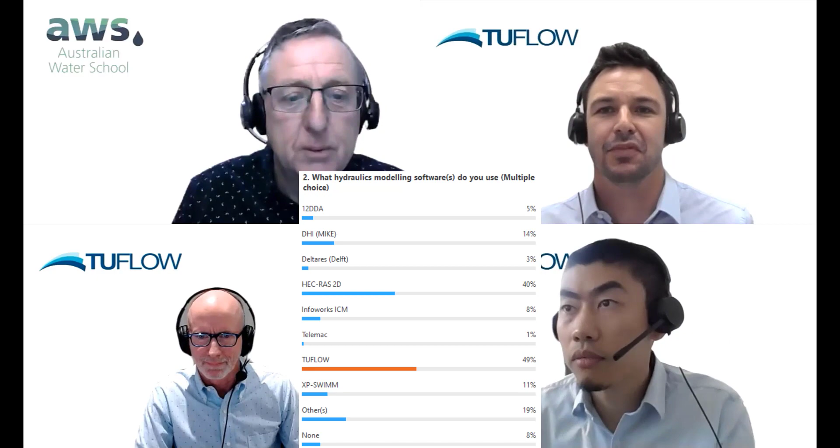And the second question, what hydraulics modelling software do you use? HEC-RAS is out there, so is Tuflow. There's the two biggies, and just about 80-90% of it's covered there. But that's pretty expected as well. Yeah, good spread overall though.

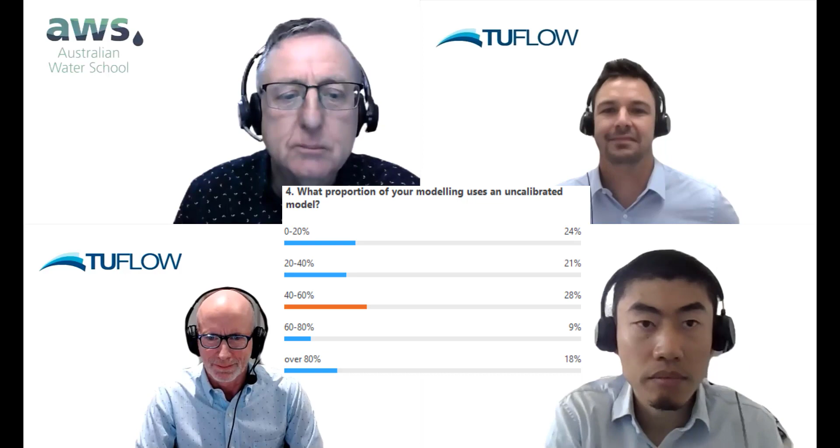Fantastic, yep, that's the way we want to have these webinars. What proportion of your modelling uses an uncalibrated model? Did you expect that? Probably about right. It's good to see that there's a reasonable proportion of calibration going on, so that's encouraging. It is, because it is hard. Often there's just no data, so you just can't do it.

And there's the last question: how accurate do you think your modelling is? There's a question for you. We chewed over this one before we put it up, everybody. We didn't know whether we should have put this question up, but there's obviously confidence going on here. Yeah, I think we need to have a show of hands on whoever put up perfect.

Right, who did that? Come on screen immediately. Tell us how you do it, because we all want to know. Wasn't that you, Bill? Didn't you? I actually want to employ them, that's what I want. Shuang and Phil, probably somebody's done this. Perfect, I love that. Hey, Bill's going to be presenting. Chris and Shuang and Phil, another colleague from Tuflow, will be on the Q&A lines waiting for your questions.

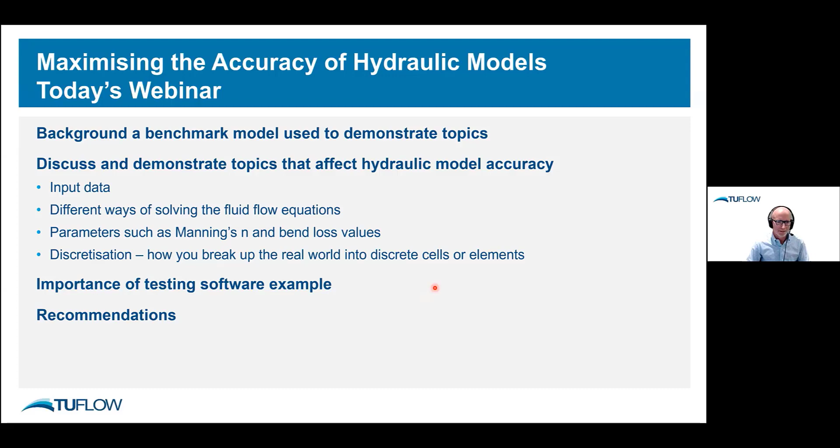I'll just finish off with the importance of testing software and present an example on that, and then I'll finish up with some recommendations.

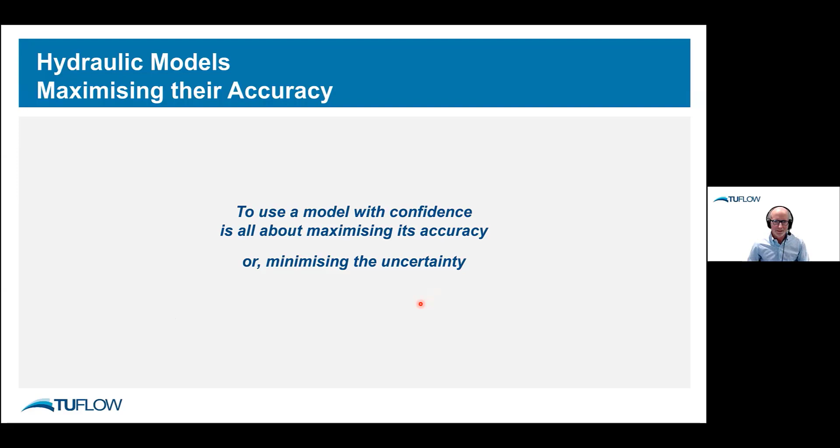So maximising the accuracy of your model and being confident about modelling, using a model, is all about minimising your uncertainty. That's really what it's all about. And the reason for that is there's just lots and lots of uncertainty in our modelling.

It can be in your terrain data, it could be in your land use data and other input data. Your parameters, such as Manning's N, any energy losses you apply, infiltration. There's lots of scope there for variation, so lots of uncertainty potentially.

Our boundaries, that's often a big source of uncertainty, not a topic I'll cover a lot today other than on the hydraulic modelling side. But if your flows coming into your model aren't super accurate, then your hydraulic modelling is not going to be super accurate.

Your model design, so actually how you structure your model, how you discretize it, can have a big influence on your accuracy of your modelling. And your numerical computation, so that's actually what's happening behind the scenes, how you're solving the equations and the options you have to do that.

So it's not to present a doom and gloom story here, but basically there are lots of uncertainties, and as modelers we need to be on top of all those and have a feel, if you like, for the effect of those.

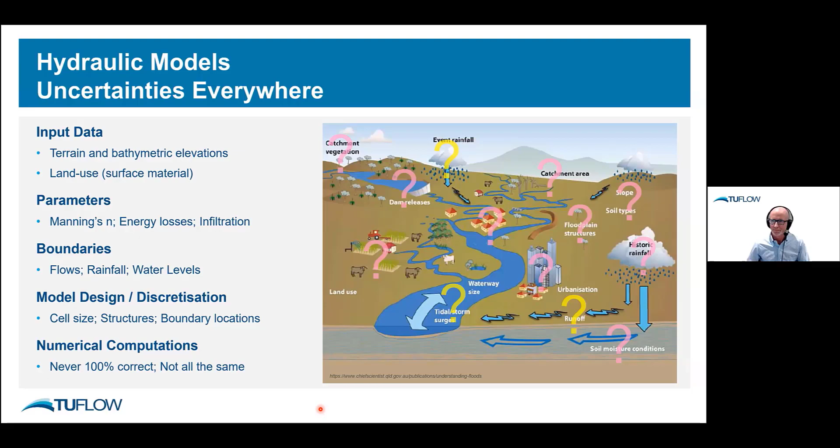And this is a bit of a journey, I suppose. When I think about when I first started modelling, probably 35 years ago, I thought models were just perfect. Today, of course, I don't think that.

And what's been really sweet is the TUFLOW 2020 release of HPC. It's got to a point where we've got a piece of software that can really model everything from a flume to urbanised catchment to major rivers, using industry standard Manning's N values, the same turbulence model without having to adjust parameters. It's got brilliant cell size results convergence, particularly if you're using subgrid sampling. Time stepping doesn't affect results. And it's got a very nice second order numerical solver, not affected by numerical diffusion or error accumulation.

So you can really punch in, if you start a model, you can punch in and run with industry standard parameters, and if you're calibrating, you should be pretty close to the mark. Otherwise, something else is wrong. But it's been really nice to get to this sort of point, and you can really be, if you don't have calibration, very confident about your results. It's the situation we're in today.

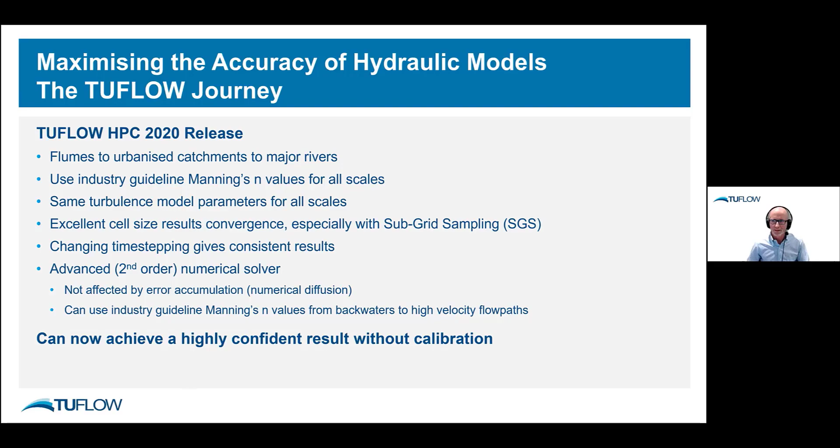So let's get into the presentation. The first thing I'm going to just run you through is this benchmark model, which I'm going to repeatedly show results from.

What I was after for this benchmark model was a real world model that has been well calibrated, so there's a lot of confidence in its accuracy, ideally quick to run, but also has very challenging hydraulics inside it. And after 35 years of seeing studies, both internally and externally, you can't really go past the Brisbane River flood study completed in 2016. It really did push the limits in terms of how exhaustive that calibration was, and how the calibration was achieved in terms of the hydraulic modelling.

So it's not ideal for a benchmark model, but this data set is potentially the source of a great benchmark model.

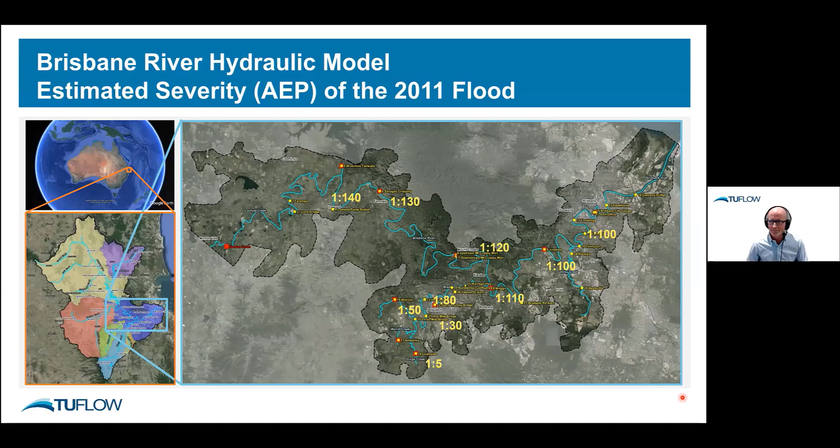So the effect was we ended up having a major flood in Brisbane of around a 1 in 100 AEP flood. The study was an exhaustive calibration. There are thousands of flood marks, 30 gauges within the hydraulic modelling area. It was calibrated to the tide, to 3 minor floods from about 1 in 10 to 1 in 20, and 2 major floods, both around the 1 in 100. So that's 5 floods of different size.

And what was critical was to come up with a model which used the same parameters for all events. There are no event-specific parameters, because lots of Monte Carlo simulations were done on this study. So you're modelling events from a tiny event up to extreme events, so you had to be confident about your parameters. This study is about as good as it gets when it comes to a calibrated model.

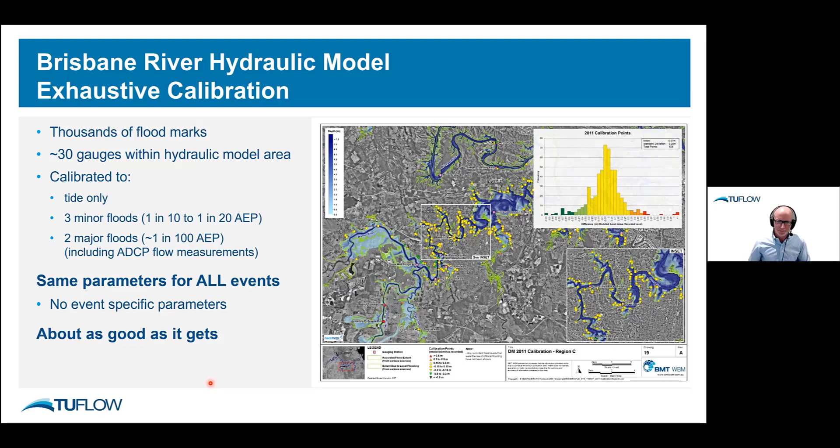So what we've decided to do is make a little benchmark model, which cuts this section of the model out. There it is there. And just to make a model that's quick to run, it's got some pre-tested hydraulics and is good to use.

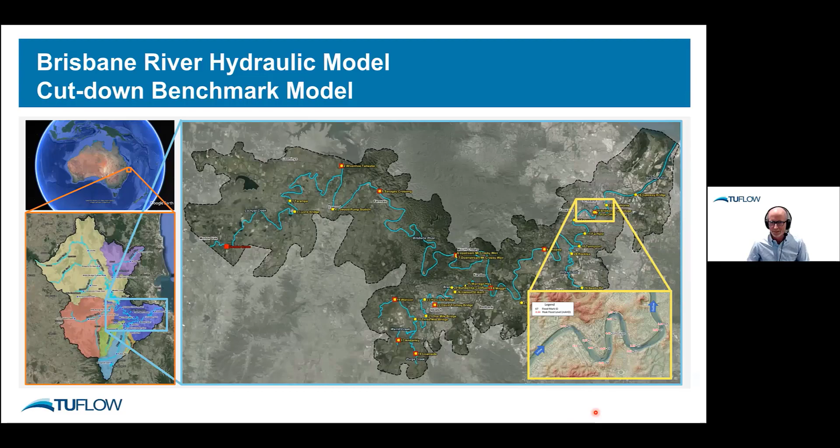Here it is here, it's about 11 kilometres stretch. It actually goes through the Brisbane CBD. The Brisbane CBD is here. Most of it's on high ground, fortunately. It's got 6 reaches in it and 5 bends.

And this is actually rock, so these bends are pretty sharp. They're not in a big alluvial floodplain, so it's a pretty hard bend here. And yeah, the water gets pretty wild.

There's 8 bridges through the site. Those bridges at the size of the 2011 flood are all clear spanning pretty much, so it's only pier losses we're having to deal with in this situation. Within this reach, there are 13 good flood marks, as shown there in red, that's the flood level that was recorded, those red numbers. There's a gauge here at the city gauge, I'll show some results at that city gauge.

What's also quite interesting is things like super elevation. So across this bend here, we're getting roughly 0.7 of a metre difference in flood level. And that's because the water comes around the outside of the bend and surcharges on the outside. So that's pretty strong hydraulic effects that are happening there.

The model developed for the flood study was a 30-metre fixed grid, so we've just adopted that same resolution for this model. And for the boundaries, we've just extracted those from the big regional model. So we've taken an inflow here and a water level boundary here at the outflow. So we've got a nice little sweet model.

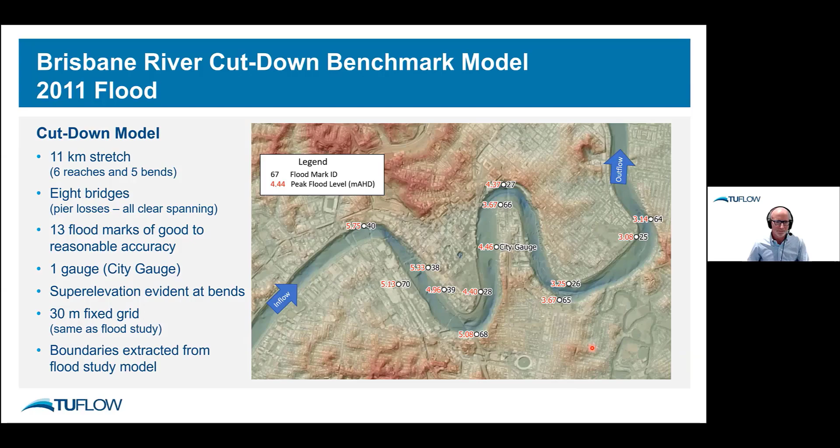And one of the reasons this is so appealing, and has such low uncertainty in terms of what we're working with, is we've got high resolution accurate terrain and bathymetry data. There's actually, unusually, this is the really nice thing, little uncertainty over flood flows.

So these graphs are hard to see, but on the right here we have flow versus time at a bridge 22 kilometres upstream, still in Brisbane urban area. Those little blue dots are flow measurements using ADCP recordings. There's a couple down here as well. The green and red lines are from the modelling for the flood study. So you can see here they've measured around the peak, 9,500 to 10,000 cubic metres a second is the range.

So you can see even measurements are never perfect. You've got conflicting amounts there, but it's very rare for a flood of this size to have high quality flow data to cross-check your modelling. So that's pretty special. This is water level on the left, the water levels they've measured at the time of the flow gauging. So that ADCP recording really is the icing on the cake in terms of having confidence about this data set.

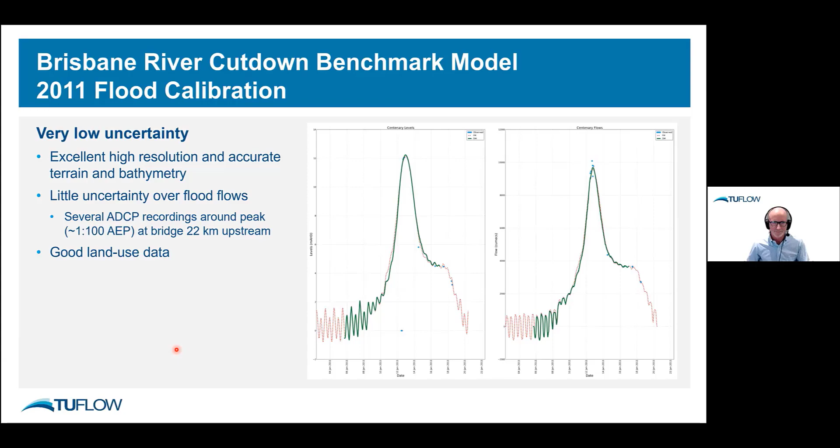So here's the benchmark model. Let's start looking. The first thing we need to do is check that it actually calibrates. That's a little bit complicated because the original flood study was done using TUFLOW Classic in 2016. That's an implicit matrix solver. Back then it was Smagorinsky plus constant turbulence model, and a Manning's N of about 0.022 for this main waterway, a tidal waterway, was found to give the best calibration for that range of floods we're looking at.

For the benchmark model, we're running TUFLOW HPC 2020. It's an explicit solver with a different turbulence model by default, and it also has subgrid sampling. It needs a Manning's N of 0.025 to get an equivalent calibration. So you can see here, the red numbers are the recorded, the blue numbers are the modeled. It's quite a good match coming through, within a centimeter in a lot of these cases.

So it's interesting in itself where you need a slightly different Manning's N because of a different solver and different turbulence model, but also subgrid sampling tends to make the system a bit more fluid. So you may need a slightly higher Manning's N to compensate for that compared to not using subgrid sampling.

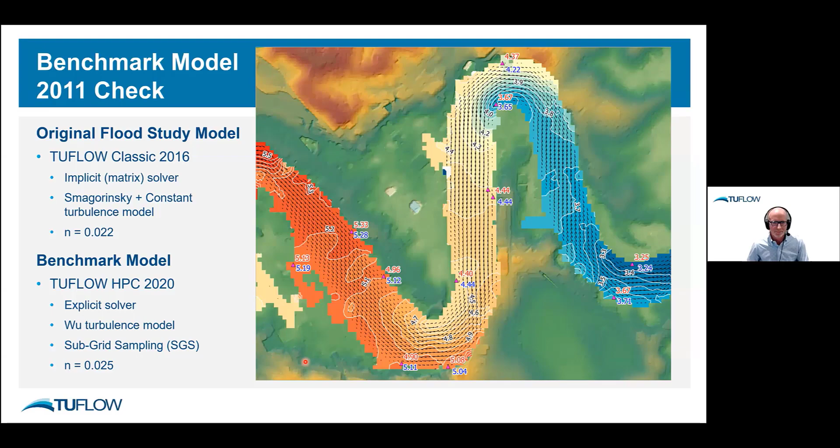So that's the peak water levels there. We also can plot the longitudinal profile down the system, from the top of the benchmark model down to the bottom. You have the bed level, along the deepest part of the river, so you can see how much this bed elevation varies. There's actually rock ledges in some places - that's the nature of this Brisbane River, a very steep system.

So yeah, that looks quite nice, but of course we might want to zoom into that. Here's the city gauge, with the 0.025 Manning's N. So that's a nice calibration.

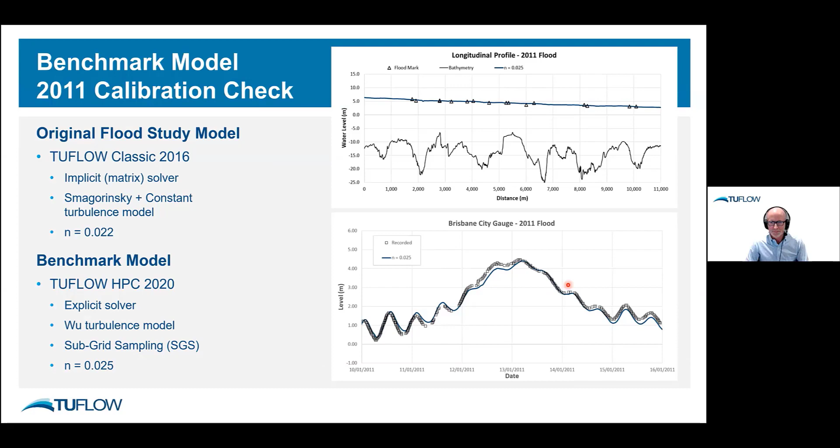You get some interesting effects, as I mentioned with the super elevation earlier. You even get a bit of a rise in flood level occasionally - it's interesting, I'll touch on it later. As the velocity slows down, your dynamic or kinetic energy converts back to potential energy, and you can actually get a rise in flood level in some places. That's why this looks a bit up and down. It's actually not unstable at all - if you zoom into those sections, it's just a rise and fall of the river as the velocity increases and decreases.

So basically, we've got a benchmark model that's reproducing reality with a high level of confidence using industry guideline parameters. So that's exactly what I wanted.

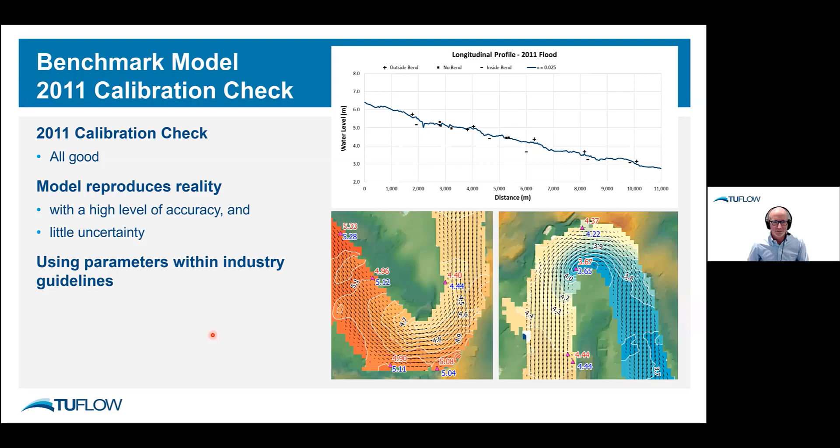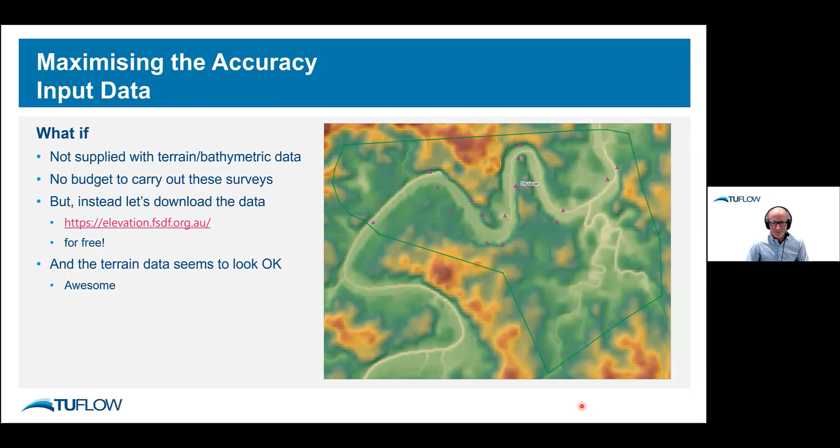So now I'm going to move on to input data. Let's explore how that can affect the accuracy of your modeling. What if you started this study and didn't have any terrain or bathymetric data, no budget to carry out these surveys, but you found online that you could download a DEM, and even better, it was for free. It actually looks okay as well, particularly when you zoom out - it looks amazing. So cool, that's fantastic.

But the bathymetry needed to be sorted out, and we found some bathymetric data as well. When you start looking at the bathymetric data, which is on a 100-meter grid, from the same download site, it looks a bit rough. So I'd be a bit pessimistic, but at least it's deeper than what the land-based survey had, which didn't really go much below the waterline. Okay, so let's feed that data in and run the model.

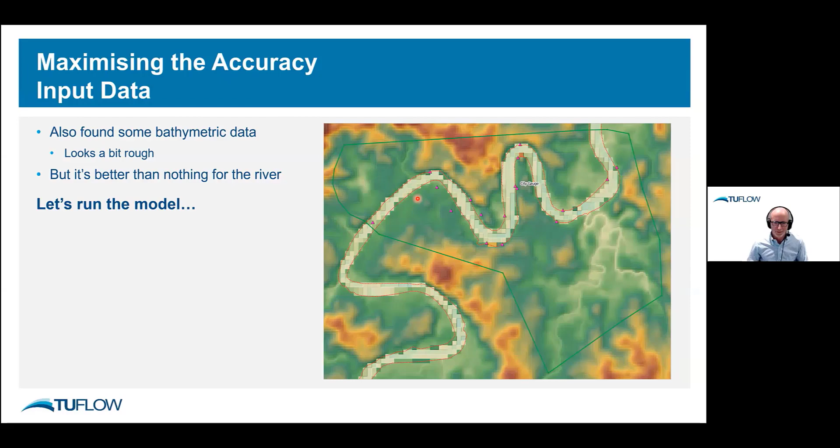The model runs fine, absolutely fine, but it is horribly, horribly wrong. This is the results from that little model with the free data downloaded. There's a choke point there, and that will be in the terrain data. That's just the model doing what you've asked it to do.

Here's the Brisbane city gauge. It's like 5 meters above the actual recorded value. And you can see the thalweg of the bathymetry there, sitting much higher than what was actually there in reality.

So you have to be very careful about the data you put in. We even tried to calibrate this scenario, and there's your Manning's N of 0.025, there's your Manning's N of 0.01, and even if you made your Manning's N 0.001, the model starts to get a bit sensitive, as you can imagine. You can't come close to the peak, so it's almost impossible to calibrate this model with that data, which is a good thing because you're feeding terrible data into it.

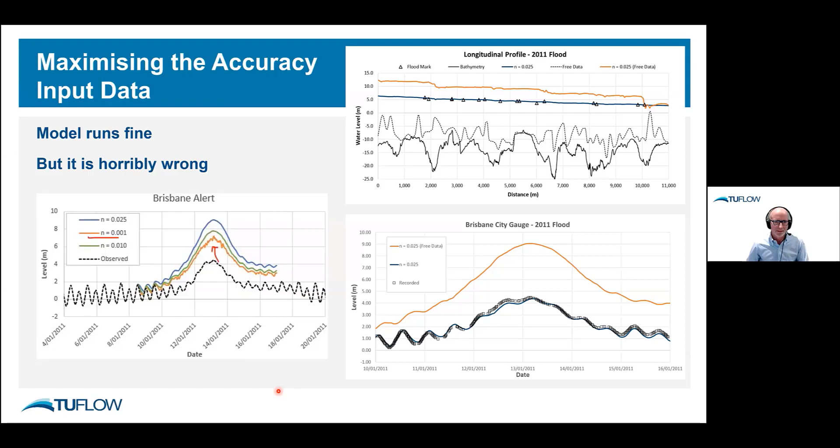And it's simply wrong just because that input data is inaccurate. It has a high level of uncertainty, has a high vertical error. And look, it's quite simple: you feed garbage into your model, you'll get garbage out. So I just can't stress enough the importance of feeding high quality data into your model if you want an accurate model. That's your baseline, that's your starting point.

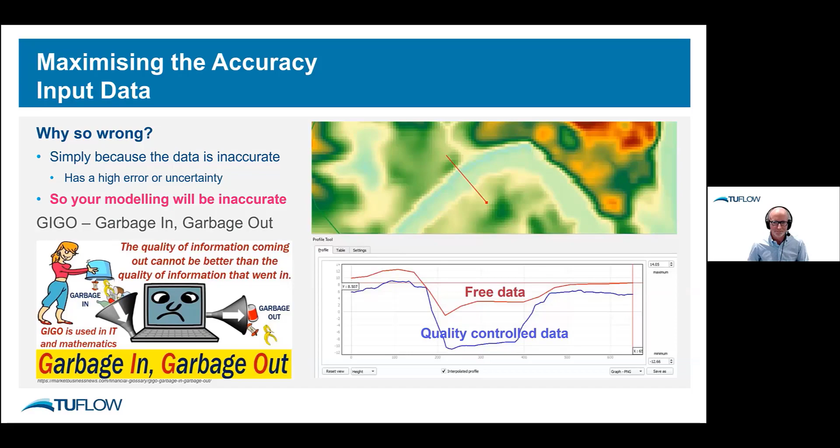So I'm now going to move on to the next section, which is on solving the fluid flow equations - something we all love, I'm sure. So here's one form of the equations.

This is the momentum equation in 2D form, and these are all the terms, or forces, or things that can affect how water moves around. Inertia, gravity obviously pushes water down, inertia will make it run up. Coriolis force, that's the Earth's rotation, can influence how the water moves around. Bed resistance slows the water down.

So that's typically a Manning's equation for most people. Atmospheric pressure can affect how water moves around, like for a cyclone or a hurricane. Turbulence comes into play when you have very fast, rapidly changing velocities. And you might have some external forces on the water as well.

Now, these equations can be derived or rewritten in various different spatial dimensions - 1D, 2D, 3D layered, or the full CFD Navier-Stokes equations. So that's one thing you'll see in the industry, 1D, 2D, 3D. But there's also quite a number of different ways these equations can be represented.

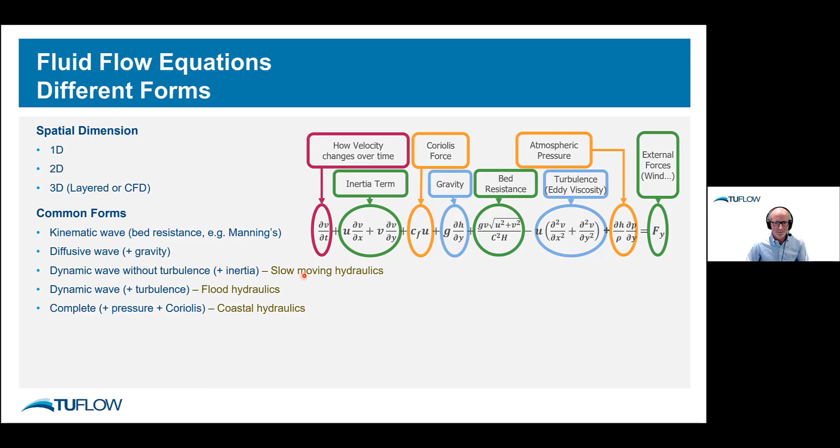Basically, we don't ever recommend using kinematic wave or diffusive wave for hydraulic models. But if you've just got generally slow-moving hydraulics, like out in the floodplain, it's probably fine not to have the turbulence term in there. Inertia would also be nice - you may get away with the diffusive wave.

Next level is a dynamic wave where we've added the turbulence term in, or some people refer to it as eddy viscosity. And that's sort of the level you want to be at for flood hydraulics. If you're into the coastal side of things, you often need to add the pressure term and Coriolis for coastal hydraulics. So you have these different forms of that equation there, and then there's different numerical solution approaches, simple or advanced, which I'll discuss in a bit more detail in a second.

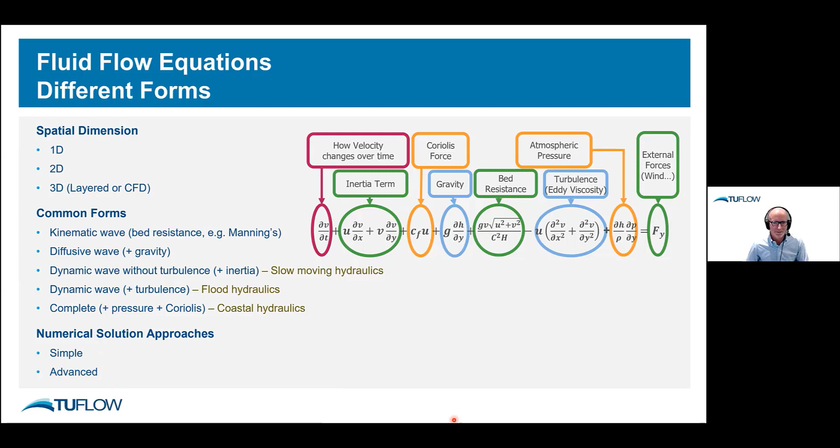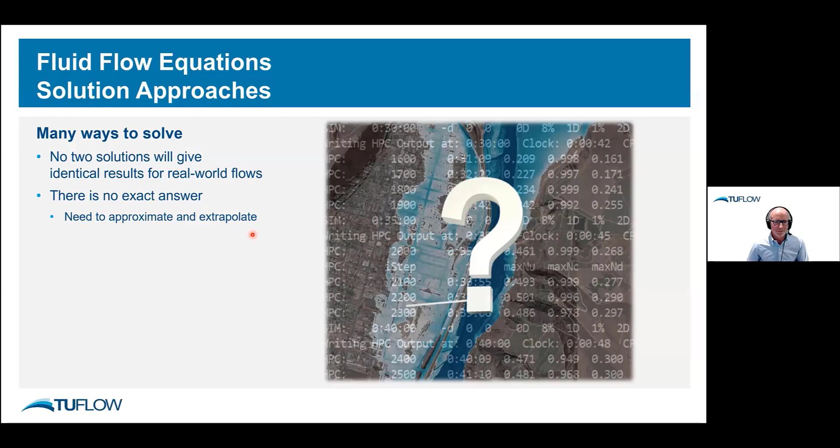So there's lots of variations, many ways to solve these equations, as I've just been explaining, and no two solutions will give identical results - that's the first thing to realize. You'll never get the same results from two different solvers, and that's simply because there is no exact answer for real-world flows. So we need to approximate and extrapolate when solving those equations. In terms of numerically solving these equations, there's two common approaches in use, and that tends to be what we call first order and second order.

I'm just going to refer to those as simple and advanced, because effectively that's what they are. The simple one is much more simple mathematics, and the advanced is more complicated mathematics.

Trying to explain the difference between those two, if we're trying to determine how the velocity of water is moving over time - this is where we were on our last calculation. We had estimated at this point in the system, we're moving at 1 meter per second, and then we need to move forward in time, in other words, a time step. You'll often hear about time steps in hydraulic modeling.

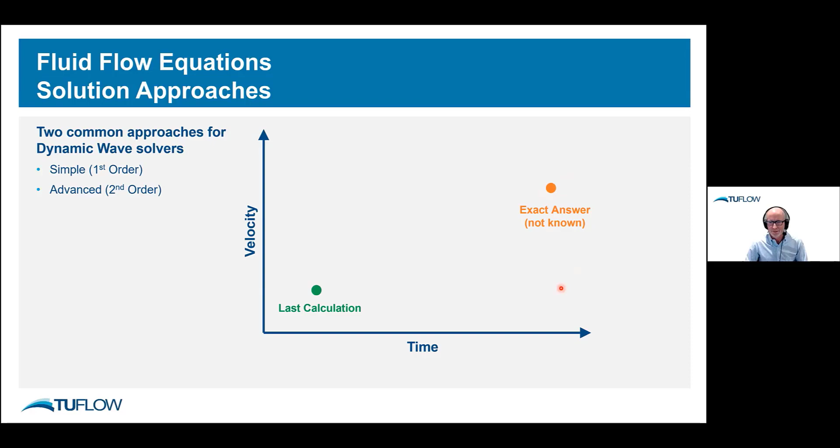This is the exact answer, but of course we don't know that. We don't know what the exact answer is for these equations, particularly for complex flows. So the simplest solution approach is effectively, if you like, a straight line projection estimate, and hopefully you'll come close to hitting that. But it doesn't hit it that accurately in some cases.

And so that error can cause a buildup of inaccurate results. The advanced solution, the second order, is more like fitting a parabola to 3 points as opposed to a straight line. Generally speaking, in free surface hydraulics, the error is very, very negligible. But there's always going to be potential for some very minor error. We tend to find that second order level is fine for this type of work.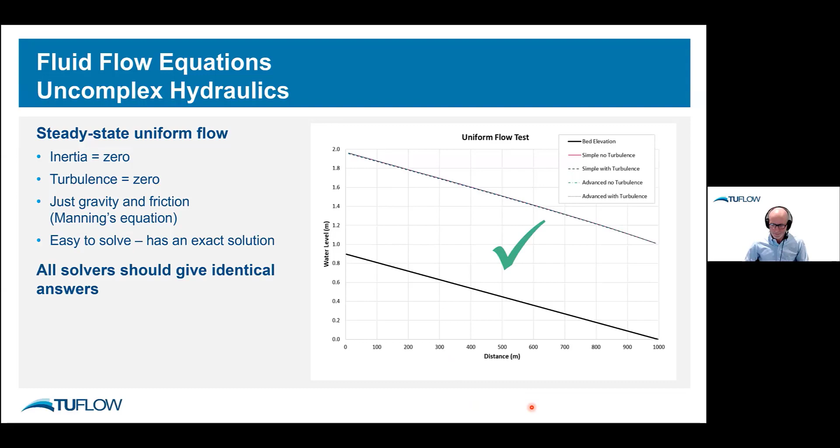Now, unfortunately, the real world isn't as simple as that, and we tend to have much more complex hydraulics. The Brisbane River is a very, very good example of that - high velocities, typically 3, 4, 5 meters per second, ripping around these bends. The resistance to flow, or Manning's equation, is proportional to velocity squared. Very important to realize that. So the higher the velocities, the more important these terms become.

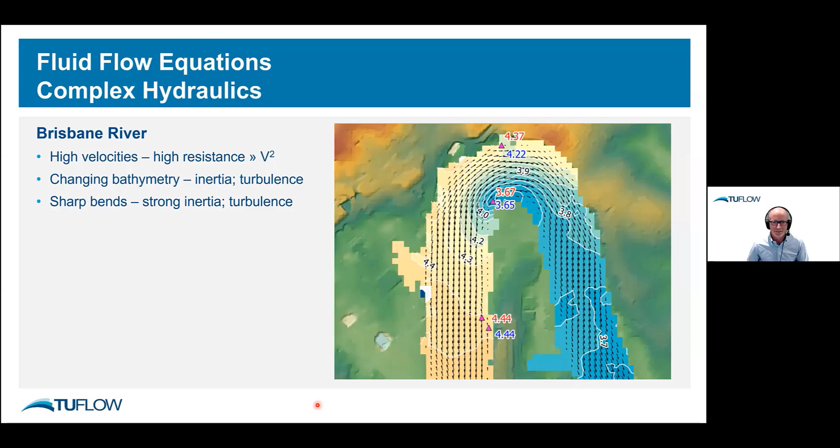There's lots of changing bathymetry, as I showed earlier with those rock shelves and the bends. So they both contribute to having very strong inertia and turbulence effects. Let's run this little cut down model using a simple and advanced solution, in this case using TUFLOW HPC, which has both a first order and a second order option available.

So here's what I showed earlier - this is the calibration, matching the marks quite nicely. This is exactly the same data set - everything is identical except we're running a first order solution, a simple solution. You can see that the flood levels are all elevated. So what typically first order, or simple numerics, tends to do is accumulate errors, often referred to as numerical diffusion, and it tends to overestimate the gradient.

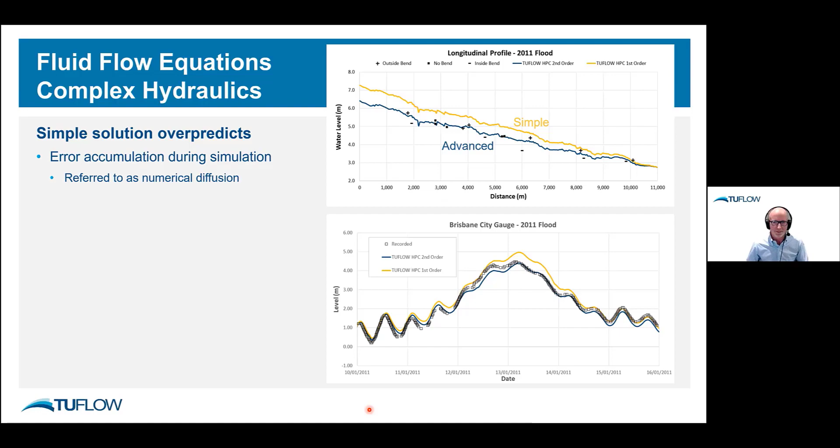So why don't we try and calibrate that simple solution? If we reduce the Manning's n from 0.025 down to 0.018, we pull that profile down, and it's actually now giving quite a good calibration - at the city gauge, it's giving quite a nice calibration. The problem, though, is that 0.018 is a very, very slippery value for a tidal river. Typically 0.02 to 0.025, 0.03 is the sort of value you would expect - 0.025 is pretty much in the sweet spot. So 0.018, while it might give a good calibration, is not within industry guidelines.

And that has implications for when you're modeling smaller events for the same river system and modeling more extreme events.

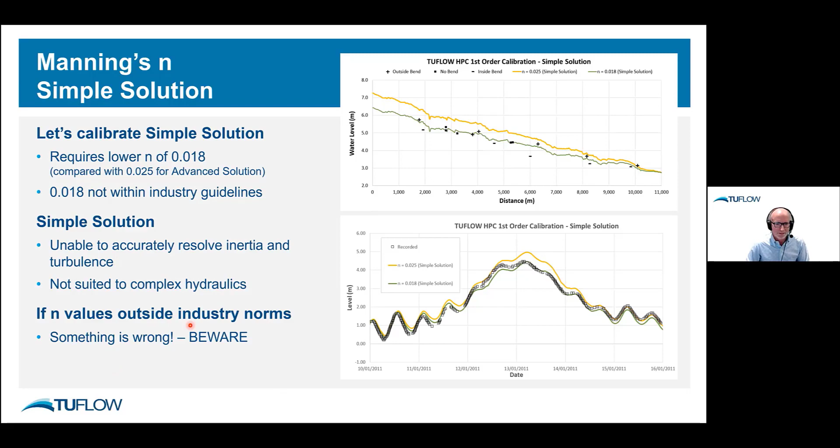So effectively, that more simple numeric solution is unable to accurately resolve the inertia and turbulence, and it's really not suited to when you're having complex hydraulics such as we've got in the Brisbane River. The moral of the story here is if N values are outside the industry guidelines or norms, then something is wrong, and you really need to take things further.

So just some recommendations around Manning's N: it really has to be within industry standard or guidelines. Typically 1D and 2D N values should be very similar, except for one exception - sometimes the Manning's N value, particularly for 1D models, is increased to approximate 2D and 3D energy losses around bend structures and flow expansions. So if Manning's N is a proxy for energy loss, you'll see quite significant differences between 1D and 2D.

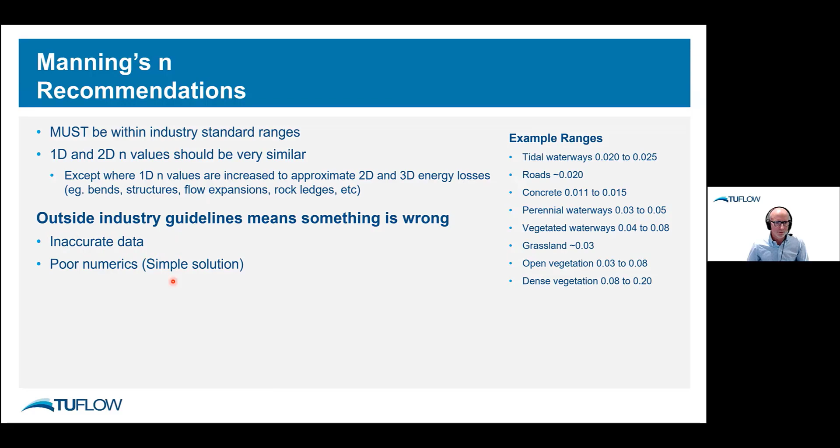As I said before, if it's outside industry guidelines, something is wrong. It could be inaccurate data, as we saw with feeding in that free DEM data earlier, or it could be that you're using a first order solution. Another really good thing to do with Manning's N is just sensitivity test it. Here's the model run, the second order advanced one, run with 0.03 and 0.02 - so you can see the effect of Manning's N. That bound that develops can give you an idea about the uncertainty in your modeling if you didn't have calibration data and needed to get a handle on that.

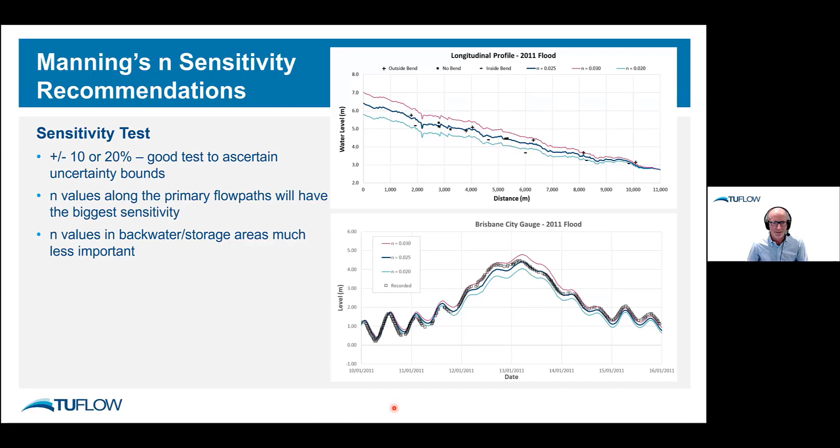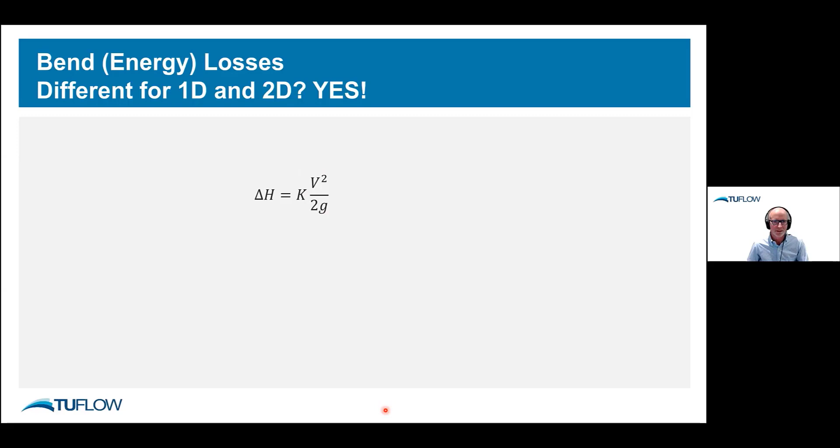Let's now discuss briefly bend losses. Are they different for 1D and 2D? The answer is yes. It's really quite important to understand that around a bend you'll have energy losses proportional to V squared, so where you get high velocities, this starts to really become an issue. Once again, the Brisbane River - this is from the earlier Brisbane River flood study - we've got 3 to 4 meters per second around here, 20 meters deep, 0.7 meters super elevation.

1D equations have no idea that bend is there, because that's like a straight line. It may look like those cross sections from a 1D model going around the bend, but they're not - as far as the model is concerned, it's just a straight line. It's got tunnel vision, and so 1D equations cannot simulate that bend loss. So you have to apply an additional loss or a higher Manning's N around a bend like this to get anything close to the correct answer.

2D equations actually do simulate much of the losses that go around here because they can model what happens when water bends around like that. But they won't simulate all the losses because there'll be losses in the vertical - water actually rotates as it goes around the bend, it's what they call helicoidal flow. So you will have losses in the vertical as well as in plane. 2D should simulate most of the losses, but not all. If you have the luxury of modeling this in 3D, you should start to not need any additional energy losses. But we're not at 3D yet, not for these flood studies.

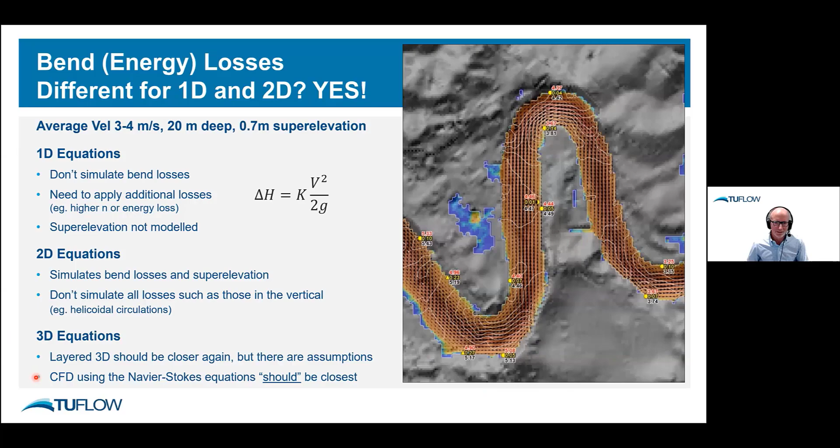So when it comes to bend losses, the recommendations are along these lines: 1D and 2D will differ because 1D needs to represent 2D and 3D effects, whereas 2D bend losses need to represent just the additional 3D effects in the vertical. If your bends are gentle bends through an alluvial floodplain, which a lot of river systems are, the 1D may need to be slightly higher using a slightly higher Manning's N or an energy loss or form loss. But for 2D, we've generally found you don't need to add any bend losses - it's only when you get to bends which are controlled by rocks, such as Brisbane River.

So these are the sort of values that came out of Brisbane River - about 20 or 30 bends where we had good calibration data. We found that using a K value of these sort of magnitude for those types of bends controlled by rock for 1D and for 2D, you can see the 2D values are quite a bit smaller. That worked quite nicely. Similarly, for major rock obstructions in the river, there's a similar story. So there's a bit of guidance for you in terms of bend losses coming out of a well documented, highly calibrated study.

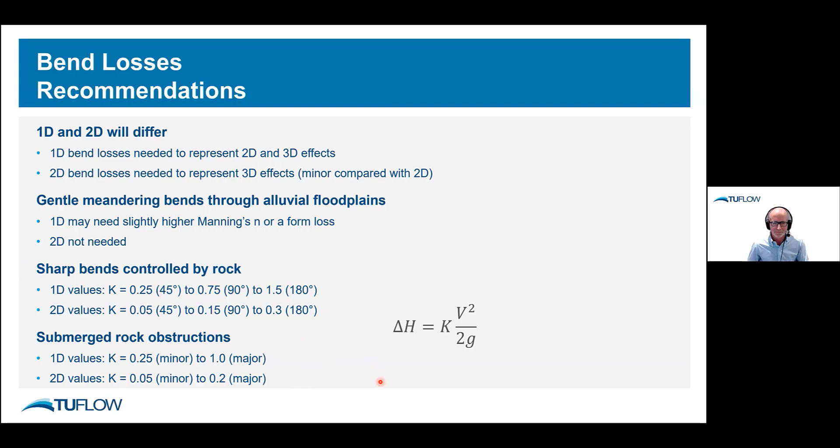Let's now talk about discretization. That's about how you break your real world up into lots of little cells and elements. It's also about time stepping. I just have one slide here on the temporal discretization, which is how you step through time in discrete jumps.

This is pretty straightforward, and it's a good test to do, though most models are pretty fine. If you halve your time step, as shown here, these two runs sit on top of each other. The blue line is the full time step and the yellow line is half that, and you can't tell the difference. That's what you're after. If you do get a difference in result, that's not a good sign, investigate further or use another software. But it's always good to do a time step test every now and then to be comfortable that there's no error being brought in.

Occasionally you may need to wind the main time step down a bit if you've got really complex hydraulics.

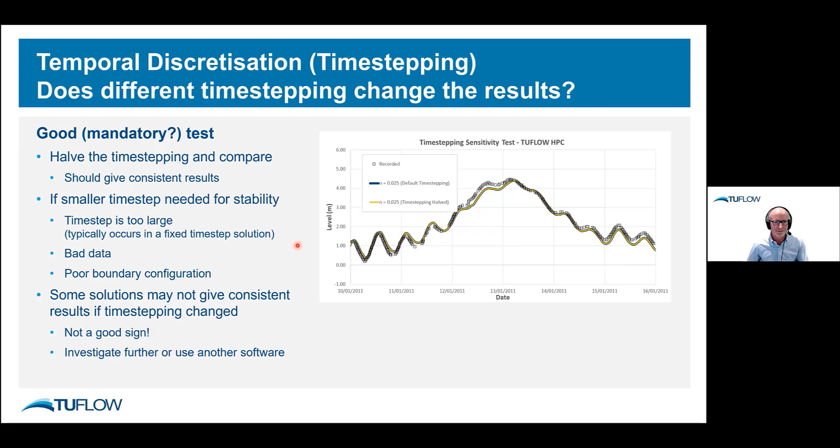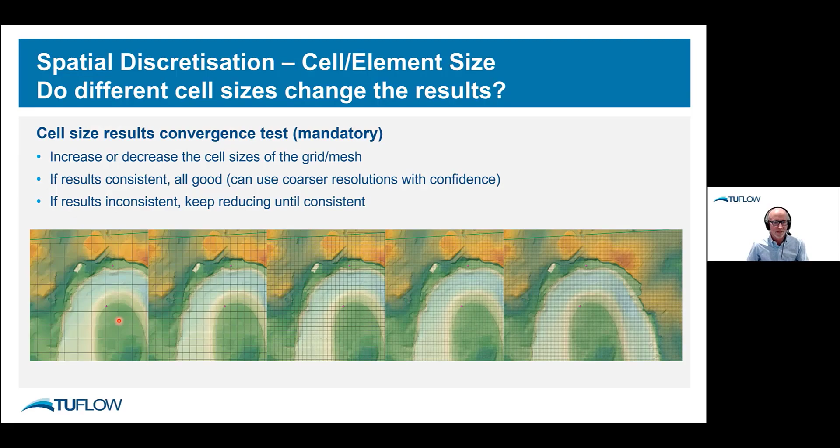Spatial discretization, this is the big one. This is where we break our model up. We could have this model at a 100 meter cell size, a 50, a 30, a 20, and a 10 meter cell size. What we're after is if we change this model between those different discretizations, does that change our results? Because if it does, we have a problem. So let's look at results convergence for that case.

We're looking for little change in results. This is that benchmark model run. The yellow is a 100 meter grid, and this is with subgrid sampling turned on. At 100 meters, even with subgrid sampling, it's just too coarse. That's 50 meter, getting closer. Then 30, 20, and 10 pretty well sit on top of each other, which is very comforting.

This is a convergence chart, with cell size on the bottom: your 100 meter, your 50, your 30, your 20, and a 10. This is the water, the gauge level was here, and that's what we're targeting. You can see that 30, 20, or 10 are giving a great result, so running a model at 30 meters is absolutely fine.

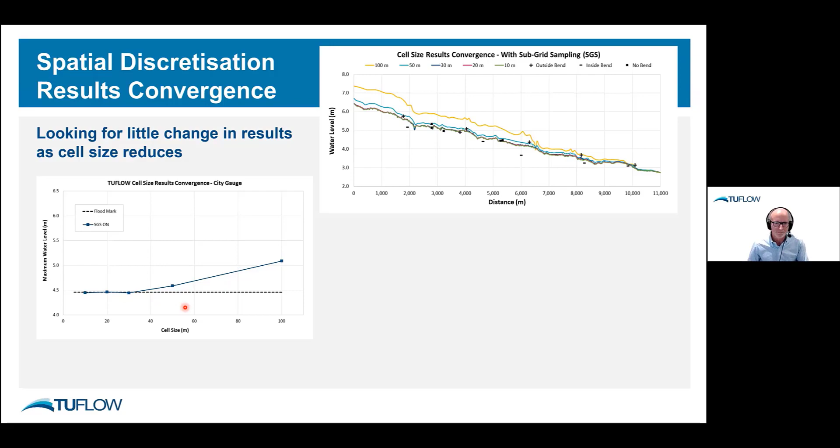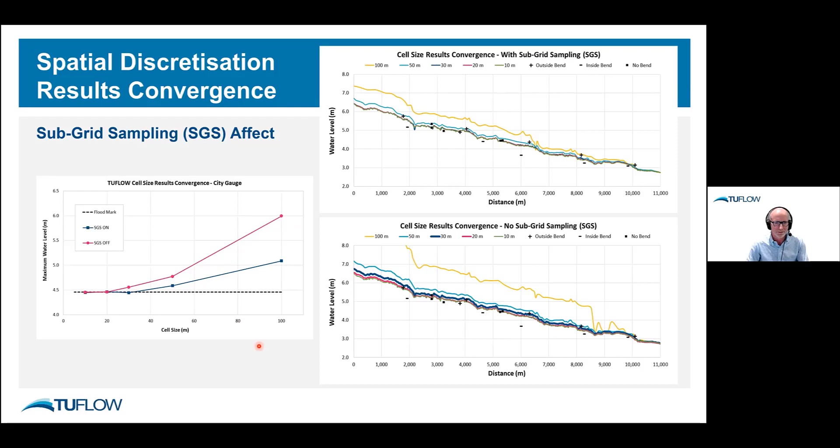Now let's just see what effect subgrid sampling has. Same deal again: without subgrid sampling, you're seeing a bigger divergence. That's understandable because each of these 100 meter cells has gone from having lots of elevations to source from to one elevation per cell, and similar for the 50. So the convergence is much delayed. But when you get down to 20, 10 meters, you're getting a nice convergence in results.

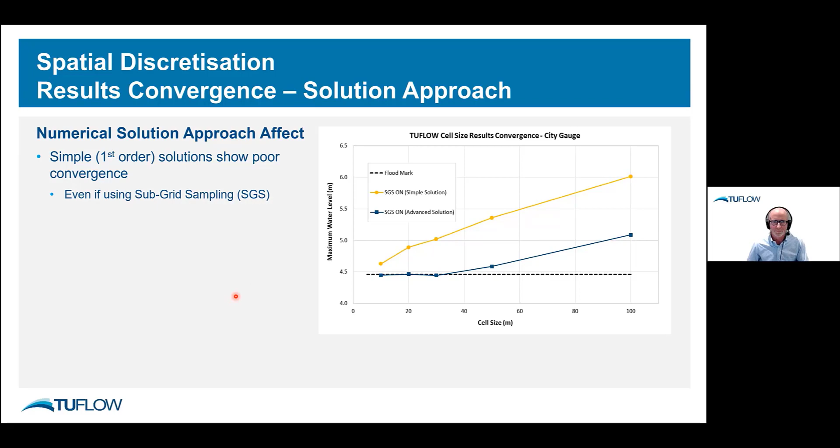Let's rerun that model with the simple and advanced solutions. Here's the advanced, or second order, solution, with very nice convergence. Here's the simple solution, it's still not converging, so not great. Not only does the simple solution over predict things, but it really struggles in terms of convergence, even if you're using subgrid sampling. So be aware of all that.

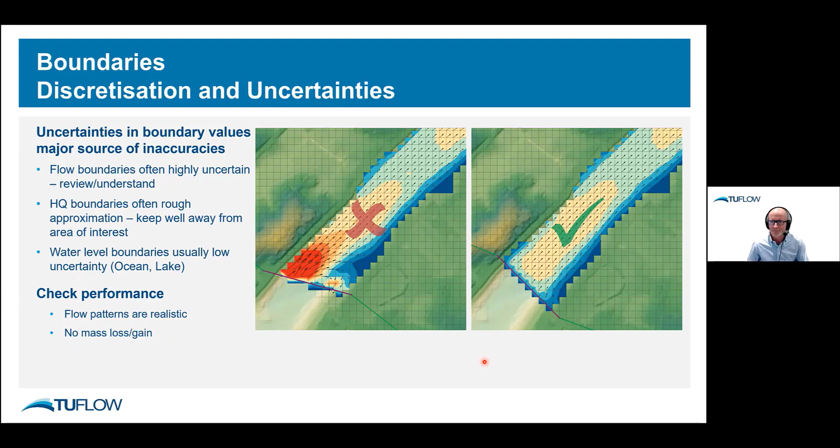That's the main thing from a hydraulic modeling point of view, just check your boundaries. Now, structures, I'm not planning to talk about structures in this presentation. We've got a webinar scheduled for the 20th of October which will be solely on structures, it really is a whole webinar in itself, so please watch out for that one.

Now, finally, I'm just going to run through an example of testing your software. It's really important when you're testing or using a piece of software that you understand its limitations. So let's apply this benchmark model to another commonly used hydraulic modeling software.

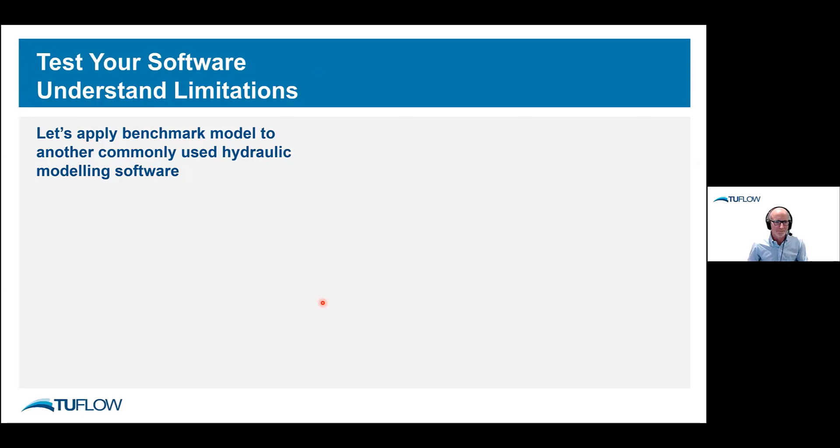In the interest of simplicity and like-for-like comparison of how the 2D equations are solved, we've had to take out the bridges. There's 8 bridges in there, and we just took out those additional bend losses to have everything on the same playing field, if you like.

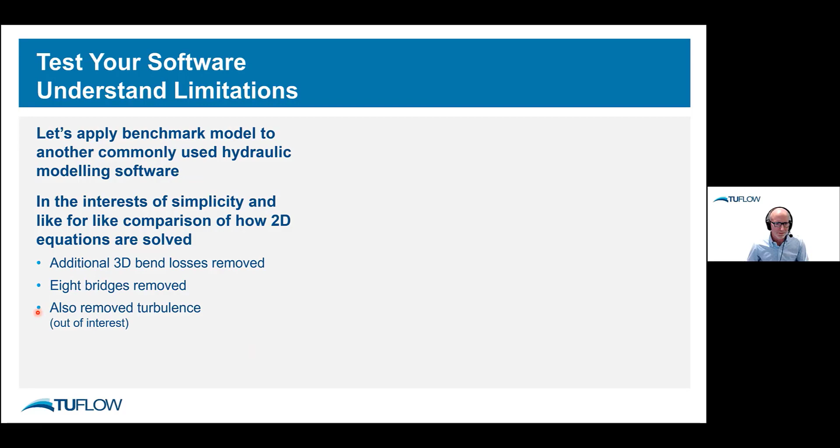Out of interest, we also did some runs removing turbulence just to see what would happen. These are the simulations here. This is the calibrated one, the blue line. The yellow line is after removing the additional 3D losses at the bends. The pink line is after we've removed the bridges. And the green line is what happens if you remove the turbulence term. It gets a bit wild, actually, a little bit out of control there.

What was quite interesting with this little exercise is that the total head loss from upstream to downstream for this benchmark model is 3.69 meters. About 6% of that was due to those additional 3D losses at the bends, so quite small - that's probably what you'd expect.

The 8 bridges, removing those contributed about 12% of the total head loss. You have to remember these are just pier losses, and for some of the bridges the piers hardly affect the flow at all because they're on the river banks - they're clear spanning bridges. But the total loss from the 8 bridges is 0.43 of a metre, or 12%. Remove turbulence, that contributed around 22% of the head drop, 0.8 of a metre. But clearly, Manning's was 60% - so that's the main contributor, as you would expect.

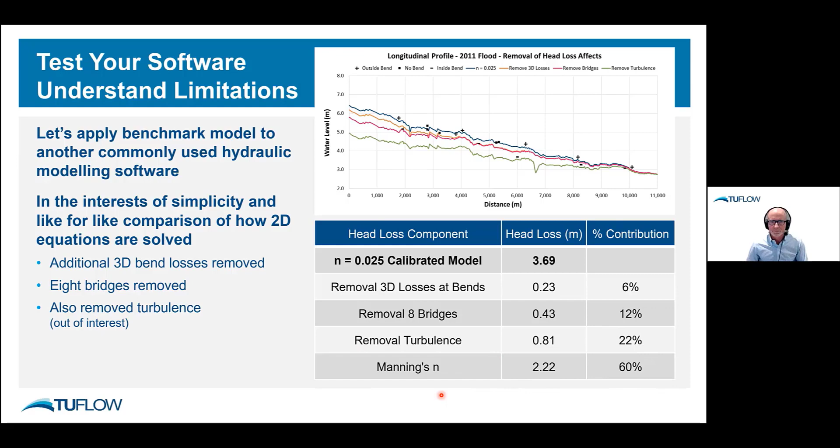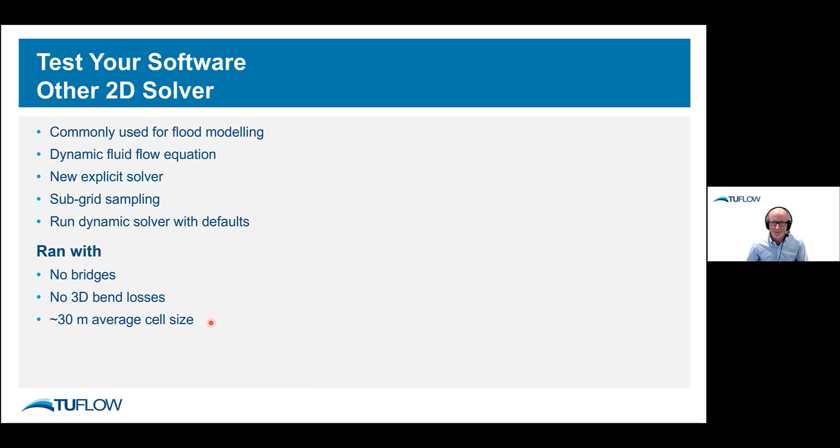So this other 2D solver, it's one that's commonly used for flood modelling. It's a dynamic fluid flow equation, explicit solver. It's got subgrid sampling, and we've just run that solver with the defaults. We took no bridges, no bend losses, similar cell size, just to get a feel for how things look.

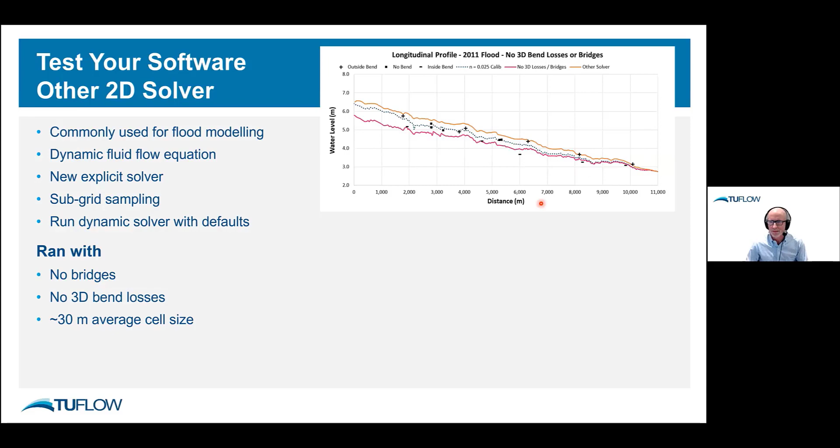So this is the result. The dotted line is a calibrated model with all the bridges and bend losses in there. The pink line is after you've taken the bridges and bend losses out. But this other solver is the yellow line - it has pumped up the levels above this pink line here. So that really is saying that it's over predicting the head loss by about 1 metre, 30%.

What's quite interesting is I've also added to that chart the green line, which is the simple or first order solution from TUFLOW, without the bridges and without the bend losses. It's giving a fairly similar gradient, actually, amazingly similar. So I suspect that this other solver has a similar sort of simplistic first order solution, which isn't really suited to this situation of having pretty complex hydraulics.

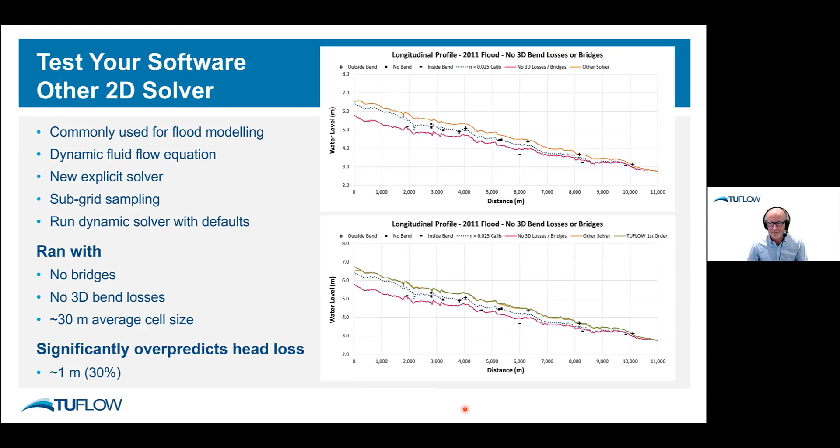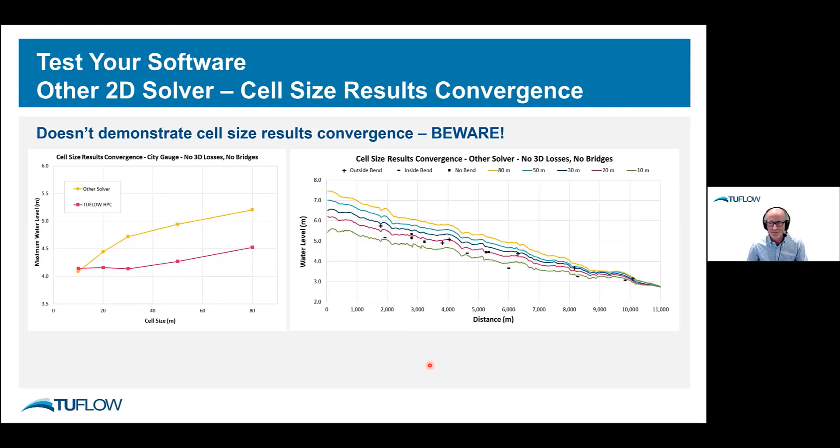Let's look at cell size convergence. So this is the other solver - we've gone from 80 metre to 50 to 30 to 20 to 10, and it's not converging at all. This here is TUFLOW HPC advanced solver, without the bridges and without the bend loss, the tiny bend losses - so it's still converging nicely, whereas this other solver is not at all. That does not give you any confidence whatsoever in that solver for modeling that type of flow.

Okay, so to wrap up, some recommendations. I'm just going to have a few slides to finish off with, and I'm going to be talking about storage dominated areas. What I'm talking about here is large floodplains, lakes, tidal flats, where the water's moving very slowly, basically.

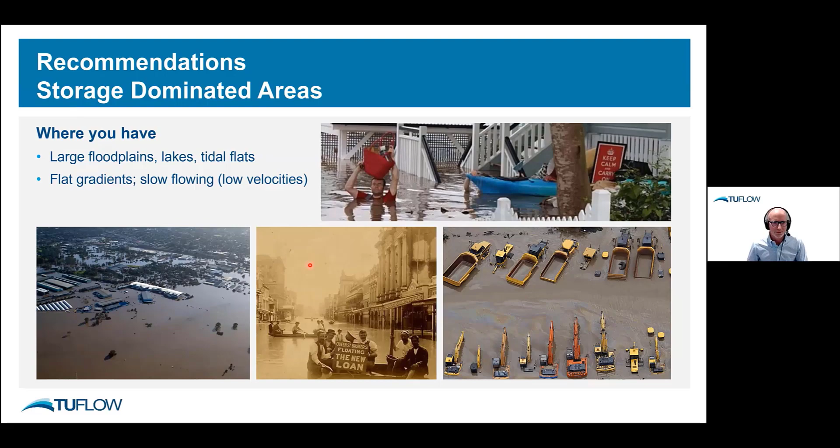And I'm also talking about conveyance dominated areas, and that's where your water is really moving - that's a completely different ballpark. So conveyance dominated areas is much more complex, and that's your primary flow paths, and certainly around things like structures and rock obstructions and buildings and so forth.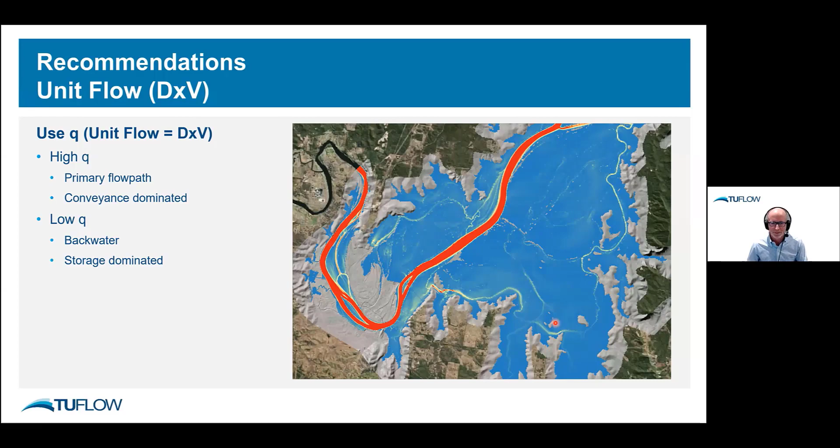So look, map up your area and have a good look. And recommendations on these different types of areas is, look, for storage areas...

Elevations still need to be very accurate. Your DEMs need to be accurate. But what you're really trying to capture is the storage. You don't care about areas that start off wet, because that isn't actually used. What we want is a change in storage as the flood rises.

You want reasonable representation of flow paths, but not as critical as for conveyance dominated areas. Obviously, embankments, to control how water moves around, you need to have those embankment crests in there as break lines. Just run with industry standard Manning's N values.

A simple first order solution would probably suffice. Even the diffusive wave solution would probably suffice in a lot of these areas, because basically the turbulence and inertia terms have no influence, or minor influence, and are not critical. So a lot of those schemes are fine in this sort of space. A larger cell size can often be used. Subgrid sampling is always beneficial.

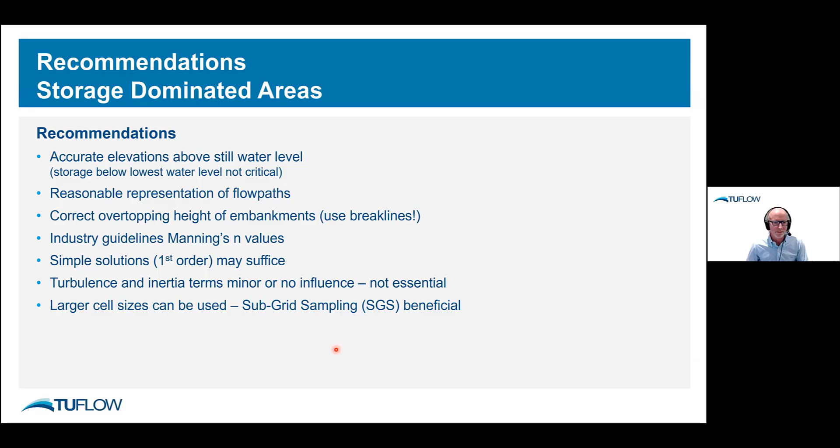For conveyance dominated areas, you really need very good terrain and bathymetric elevations, because if you don't get that flow area correct, you won't come close to getting your hydraulics correct. You need to be using industry norms for Manning's N values. You will probably need to focus on any bend losses at sharp bends or submerged obstructions, taking the advice given earlier.

Definitely always want to have good representation of structures, because the flow is trying to squeeze through those structures. In terms of embankments overtopping, that's always important. You definitely need to be running with a quality advanced second order solver with a good turbulence model. That's absolutely essential, and you want to be reproducing the velocities well.

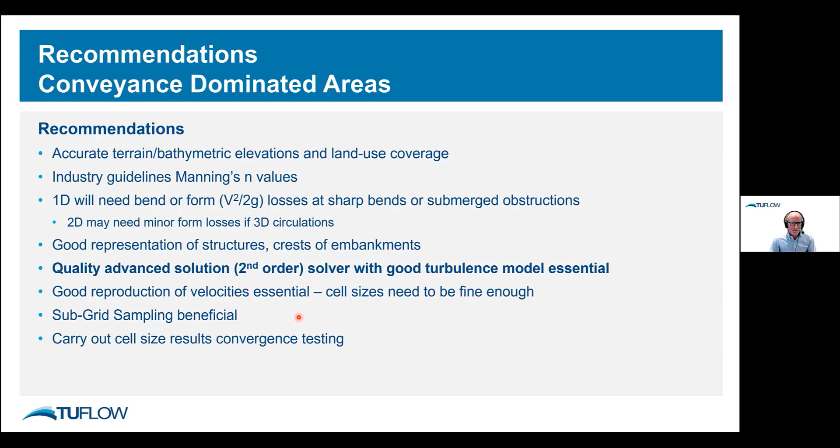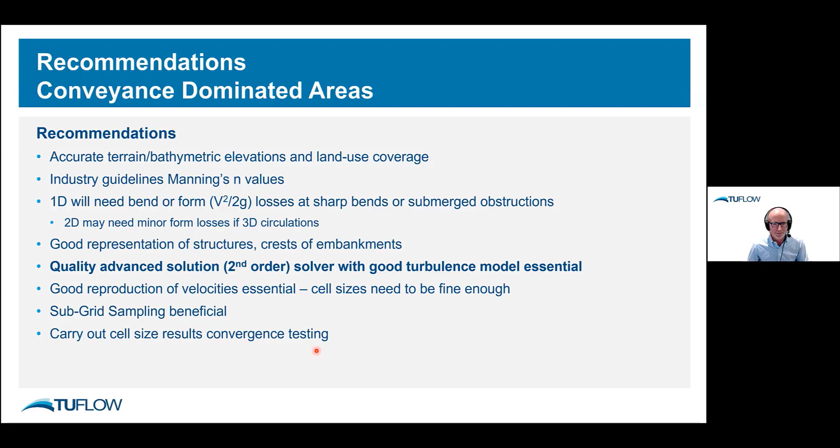We saw that going to a 100-meter grid on the Brisbane River just doesn't do that. So you need to be getting down to a fine enough cell size to have good reproduction of your velocities. Subgrid sampling, beneficial as always. And make sure you carry out cell size results convergence testing. That's really, really important. Okay, let's wrap up.

So maximizing the accuracy of your hydraulic model is basically achieved by having accurate terrain and bathymetric elevations, also good land use data. Subgrid sampling helps. 3D break lines are essential to make sure you get the hydraulic controls in place.

Run with your Manning's N values as per normal. Don't use Manning's N values outside their norms. If that's the case, if you're calibrating and you've got a strange Manning's N value, something else is wrong. And those Manning's N values won't necessarily apply to simple first order solutions if you've got complex hydraulics. You may need energy losses at rocks and bends, and there are some recommendations on those, as I've given previously.

Hydraulic structures essentially need to be well represented. Watch out for our webinar in October.

And if you want a second order or advanced solution, dynamic wave is really, really, really important for your conveyance dominated areas. And do your cell size results convergence testing. It almost should be a mandatory test. Thank you.